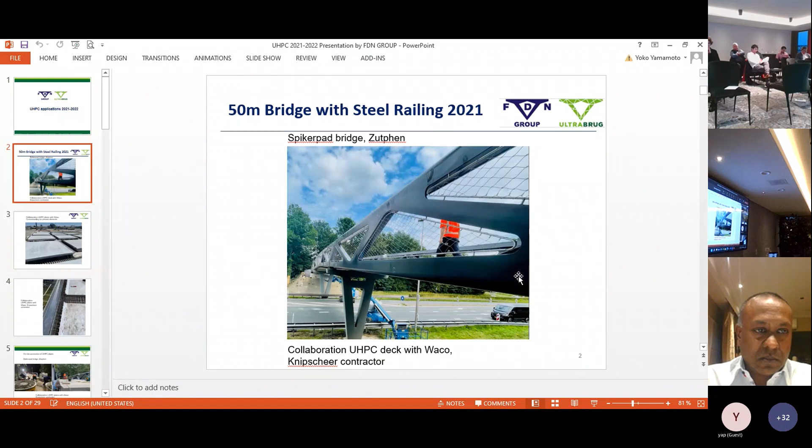The deck elements were about 5 meter by 3 meter in size, and we had 14 of these deck elements. Here we see the elements which we made in Bergen op Zoom at Waco. Aalborg Extreme was used as the UHPC.

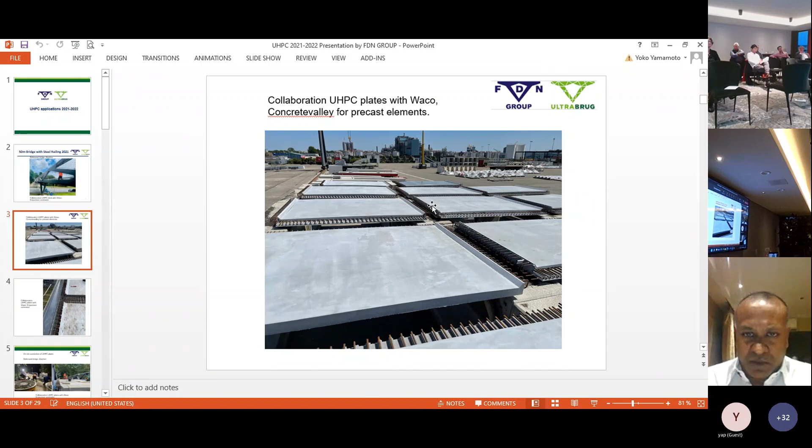It was quite a complicated connection, which another group also designed for the tender, with very slender connection plates, as you can see on this slide. It had to be produced in a few weeks' time.

So it was more of a logistical problem than just design problems. Here you see the connection with the steel railings and the UHPC plates. There were welded rebar onto the steel railing sticking out, and then we made an in situ connection of the plates to the steel railings.

This whole bridge was built in one weekend, Friday, Saturday, Sunday. It was only possible with this precasting method to do this with the large steel railings. We also researched whether we could do these railings in UHPC concrete with post tensioning, but that was too difficult. The steel railing was much lighter to handle and to be placed in one weekend, so that was the choice.

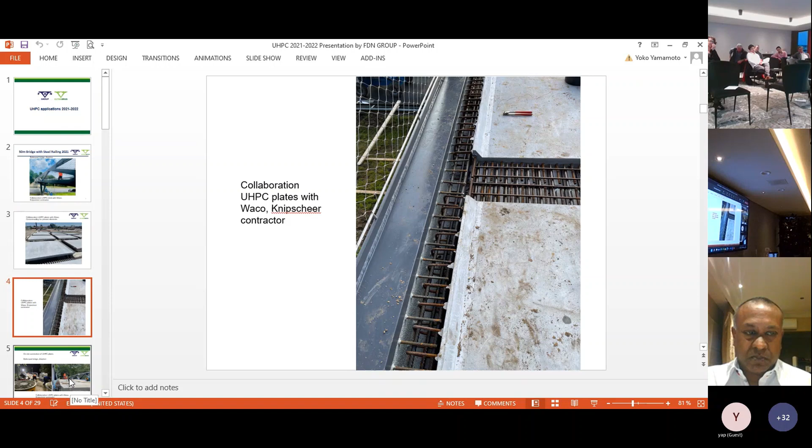Here you see the on-site work. It was actually the whole weekend, day and night, we were working on connecting the UHPC plates to the railings. It was mixed on site and then poured onto the connections.

You can see here that these were really small mixers, about 400-liter mixers, which were hired for the on-site connections. The mixers were just too small, so it was quite a lot of work to mix and pour this concrete. In retrospect, we think we would have done it much differently if we had another project like this.

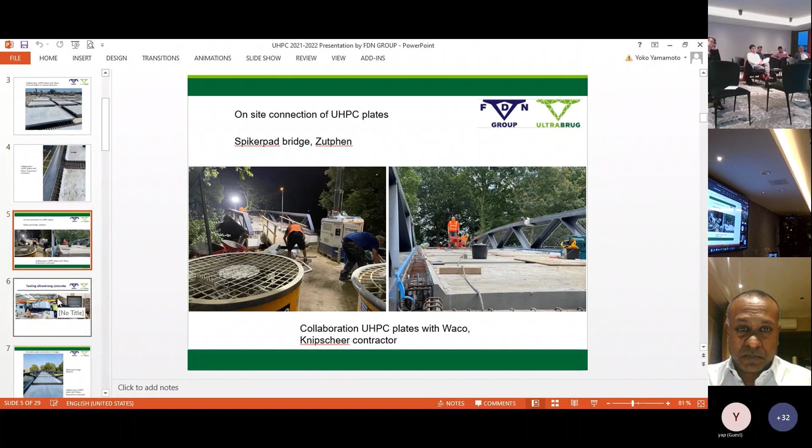Here you see us, we didn't have this kind of mixer. This is a large mixer with about 2 to 3 cubes of concrete, which could be mixed on site. This was only available after we finished the previous project, so there was not much chance, but this would have made the job much easier.

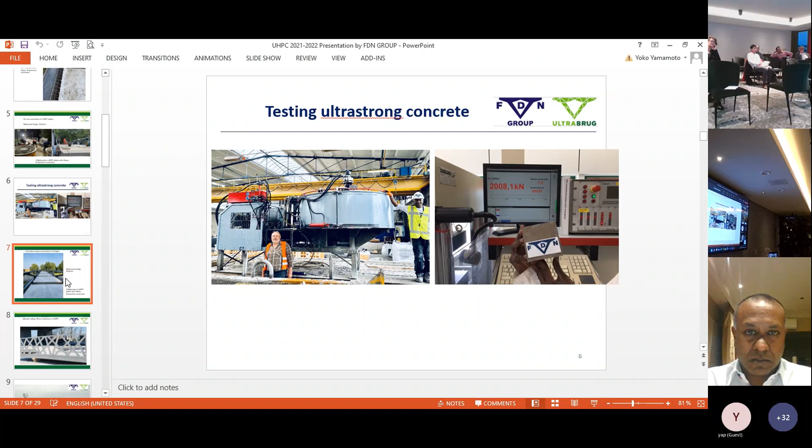This installation of the plates was done actually within about 5 hours. All plates were laid between the 2 railings, and then it took us about 24 hours to make the connection between the plates and the railing.

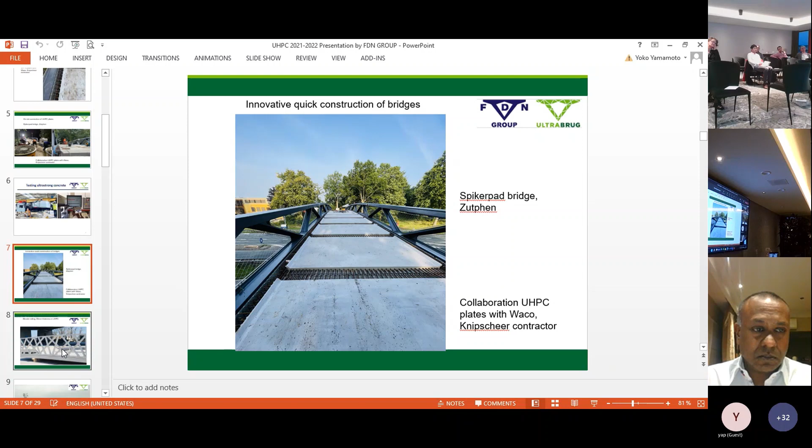This is another UHPC bridge project where, since we are mainly structural engineers, we tried to make it as slender as possible for a pedestrian bridge. So these railings have a thickness of 50 millimeters.

The positive thing is that we tested the railing and it fulfills the 3.5 kilonewton horizontal load. The only problem is that the client still does not really believe this is possible, so we still have discussions about the two bridges we built with this railing. But it fulfills, it's calculated according to Eurocode.

But of course, when using UHPC, this was a C130/145 quality. The Eurocode does not comply with this material, so we always resolve it through testing. That does create a bit of confusion or discussion with the client about what is allowed and what is not. In the end, you do a test to prove that the railings fulfill the Eurocode loadings.

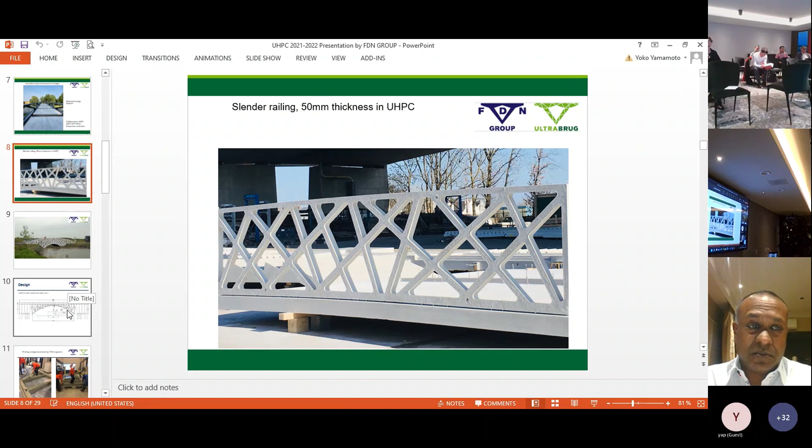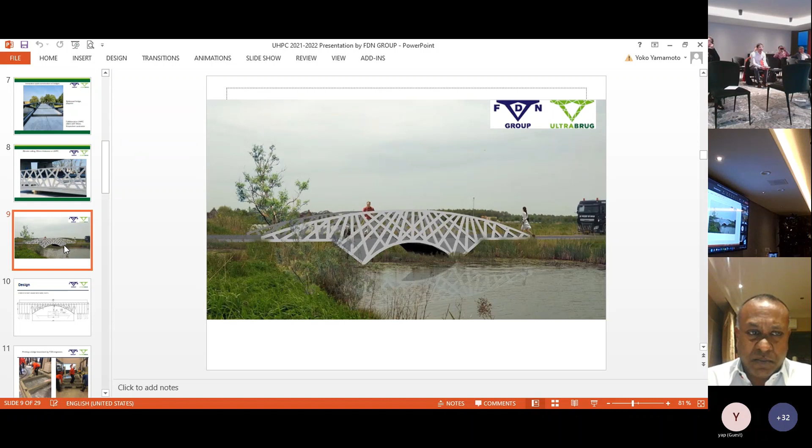This is a design also made with high performance concrete, but it's a design for a printed bridge. We did the design work and also the research to make this bridge. It's not constructed yet, but this is a railing that has been printed. And the main structure of the bridge, shown next, is an arch configuration.

It's actually made out of printed parts which are connected to each other with UHPC, and with high strength concrete, the connections should be possible too. We wanted the bridge, which is not a pedestrian bridge but a heavy traffic bridge, designed for a 30-meter length. You can see the arch is about 24 meters long.

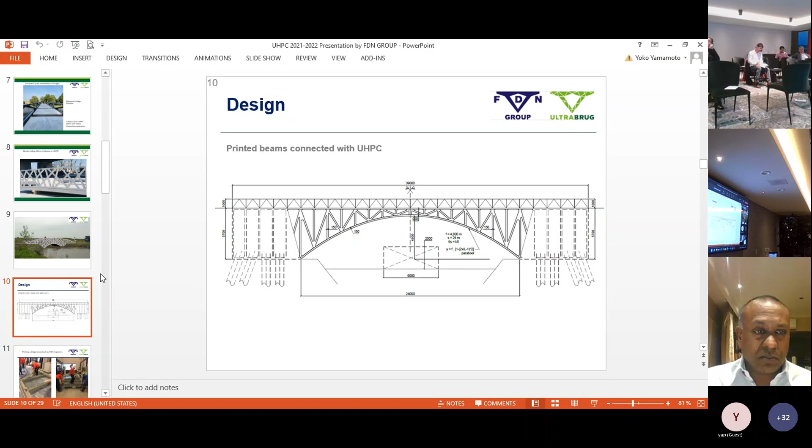And we incorporate foundation piles, steel piles, into the printed bridge structure. In the next slide, here we are busy actually printing with a concrete printer, printing the layers.

It's a C90 quality concrete used for printing, but that's not sufficient for a heavy traffic bridge. So after each print layer, we lay reinforcement by hand in between. This is a group of about 5 persons laying the reinforcement for one beam. We do think that in the future there will probably be some robot doing this work, but for now we have to do it by hand until such a robot is developed.

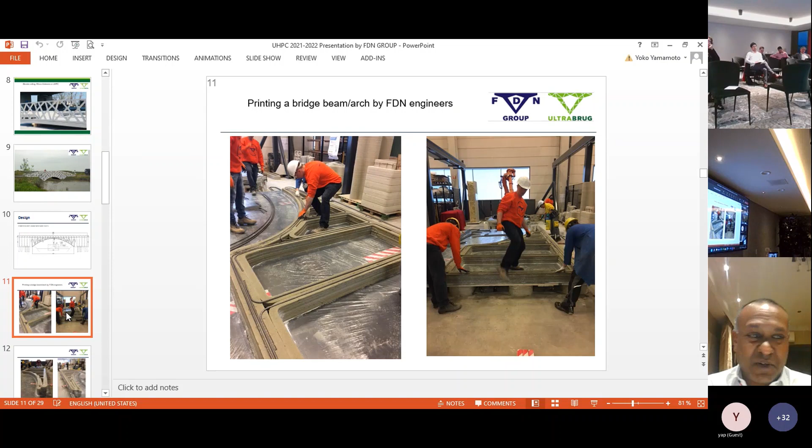This next slide is the finished half arch of the printed bridge design. You can see the end result on the left, and on the right you can see that after a few layers of printed concrete, we have placed the reinforcement in the layer.

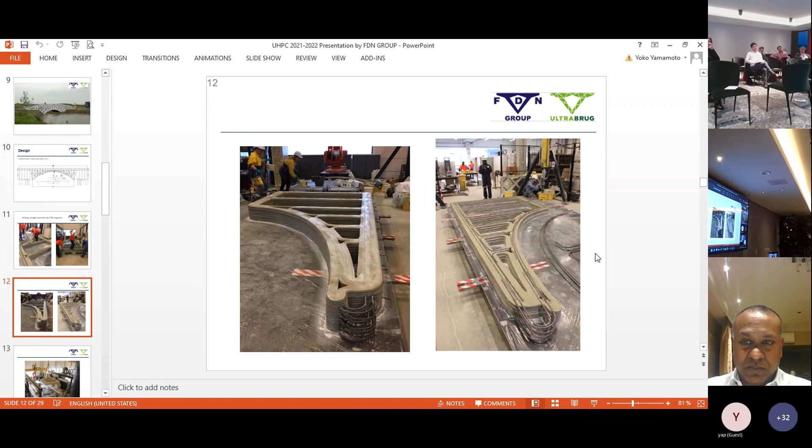This is me standing next to a setup which we are testing on heavy traffic loads. In the middle, on top of where I'm standing, is a UHPC connection between the two arch parts. We printed the left part and then the right part, and then connected them with UHPC in the middle. This beam was tested up to the Eurocode heavy traffic loads.

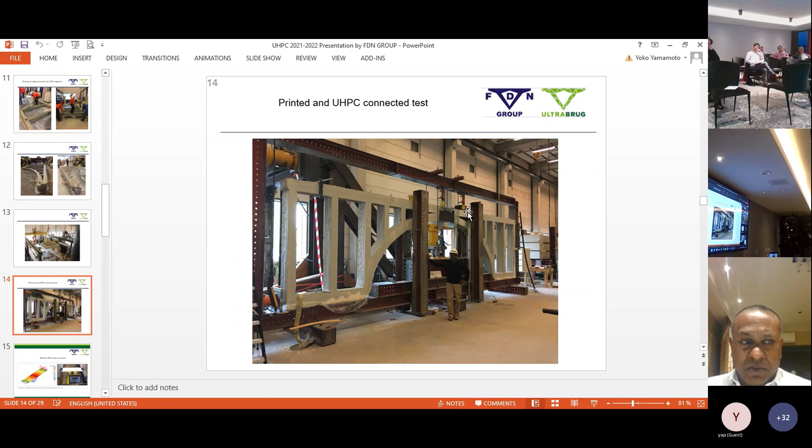This next slide is about a step which we optimized. That means for a staircase for a school, we made steps with a thickness of 35 millimeters. Again, because it was so thin for a building step, for a staircase, we ended up in a lot of discussions about whether this complies or not. So we had to test the step, and calculations are always conservative, so we were quite sure that this complies.

But then during the test, you could see that it could handle twice the load of the ultimate limit state. So our client was quite satisfied that, although the step is so thin, there is sufficient safety against collapse.

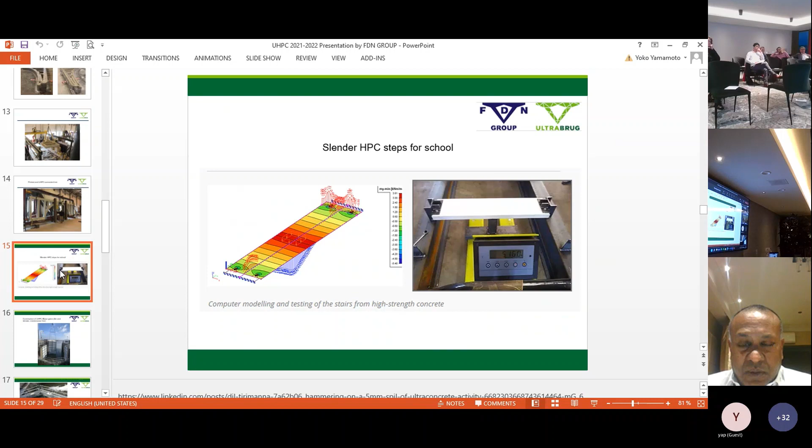The latest project, although we've been researching this for almost 3 years now including the Corona period, is making sluice gates with dimensions of about 7.5 meters by 5 meters for the province of Groningen. We first did material testing, then collision testing on thin plates, and after that we started the construction phase.

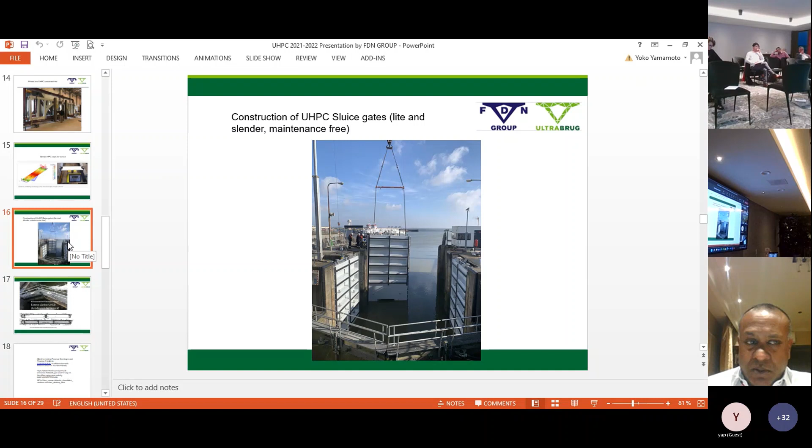I can show you on the next slide what the sluice gates look like. This is what we are calling the first slender UHPC sluice gate. The thickness of the plate of the sluice gate is 60 millimeters, and we use rib structures to stiffen the plate where necessary.

It should be able to withstand heavy ship loads. But of course, the reason we are making floodgates or these sluice gates in UHPC is for maintenance. Also, one problem was that it has to be a light structure, because previously there were wooden sluice gates there, so we have to comply with the load the existing concrete structure needs for all the joints of the sluice gate.

That's the reason we have chosen UHPC. The top part is just a thin plate with ribs, and the bottom part consists of two plates of 60 millimeters with an EPS core. That's the part that goes underwater and gives an uplift for the floodgate to make it even lighter.

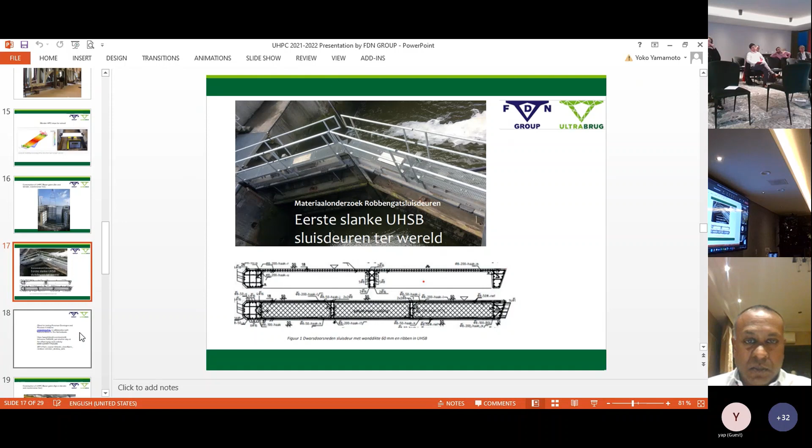This was a slide, I do not think it will work, but when the presentation gets shared you could click on it and see some testing we are doing on thin plates of 60 millimeters, where we have a kettlebell of 45 kilos that we lift up with a crane and drop onto the 60 millimeter plate to see what happens. According to the tender regulations, we had to do a test with a kettlebell of 45 kilos and drop it from a height of 3.5 meters onto the thin plate.

But in reality, nothing happened from 3.5 meters, so we lifted it up to about 22 meters. When you make your calculations, the load on the plate by this kettlebell is about 30 tons when you lift it to a height of about 22 meters. So we dropped it on the plate, and nothing happened - the plate just survived this load. Our client, the province of Groningen, was also quite satisfied that small ship collisions will not cause the door to collapse.

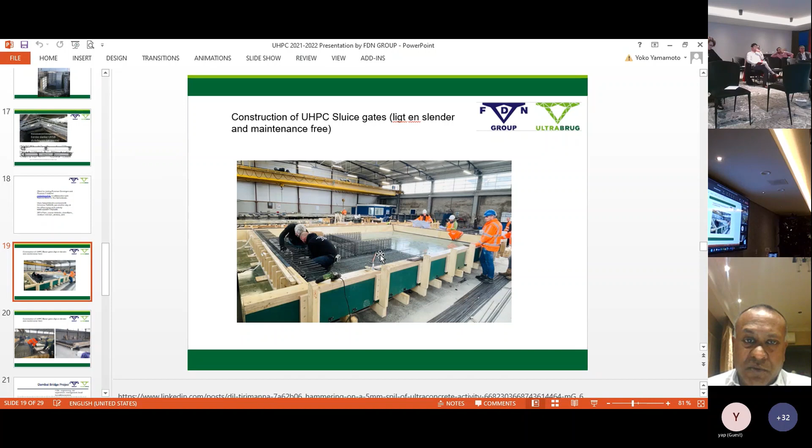These are some photos of the production of the sluice gate in Groningen itself at Haitsma, a large precast builder. We use traditional reinforcement plus fibers for this gate. Here you see the reinforcement with the hinges of the sluice gate and the placement of polystyrene blocks on the left side in construction.

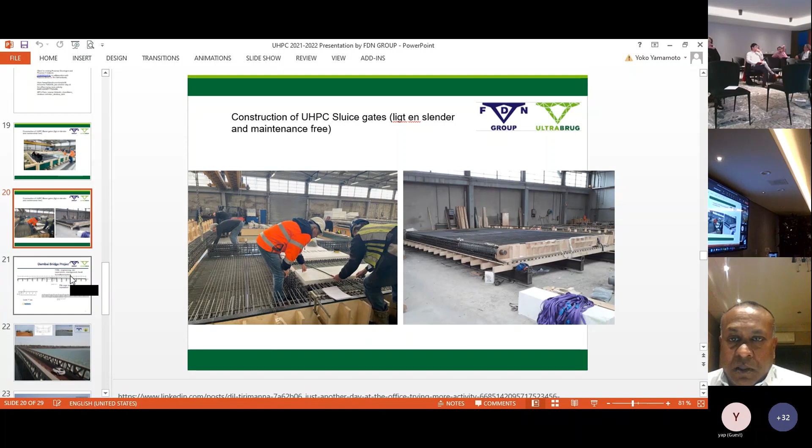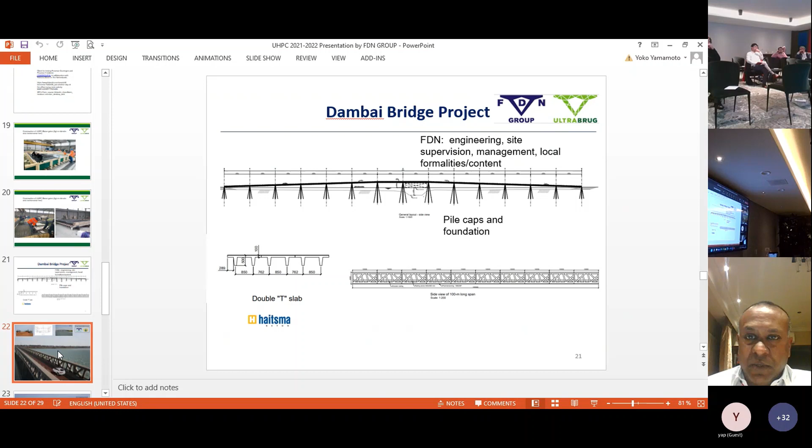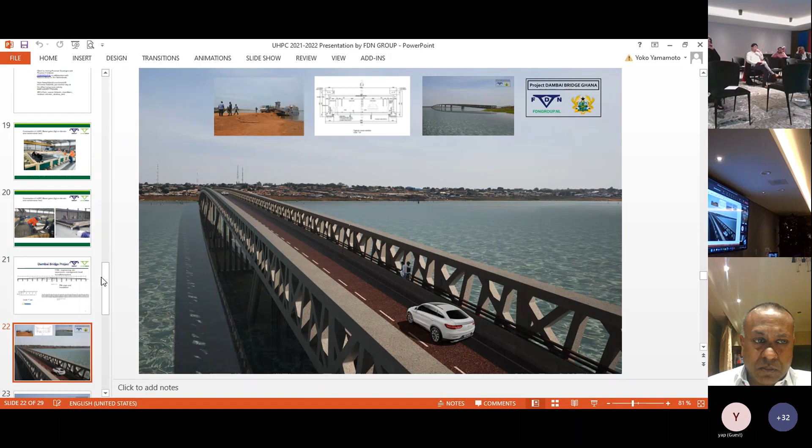This is one of their main rivers, and the bridge has a width of 11.5 meters. Here's another impression of the bridge, and this is the cross section. What we plan to do is produce elements in UHPC in the Netherlands and transport them to Ghana for quick construction - that's actually the plan for this.

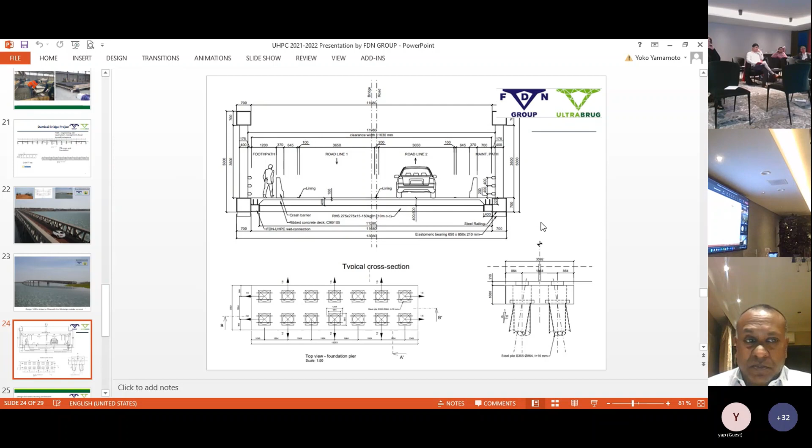Further at FDN, we design many projects and constructions in concrete. One of the products we developed about 15 years ago are floating breakwaters. Currently we also have a project designing floating breakwaters, where the wave height to be damped is around 4 meters, so we are making a design for a floating breakwater in high performance concrete.

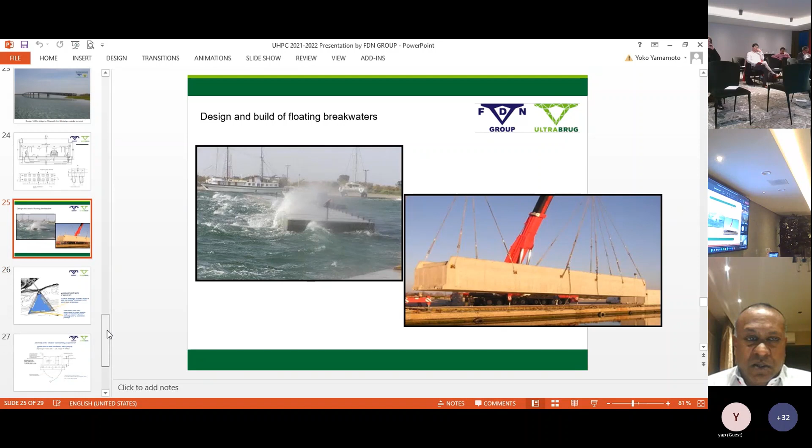You can see on the next slide what this looks like, because high performance concrete is really a material for a sea environment, with thin elements you can produce. You can see this is a triangle shaped port in about 80 meters water depth, and we will prefabricate elements in a dock, then tug them to site and connect them with each other.

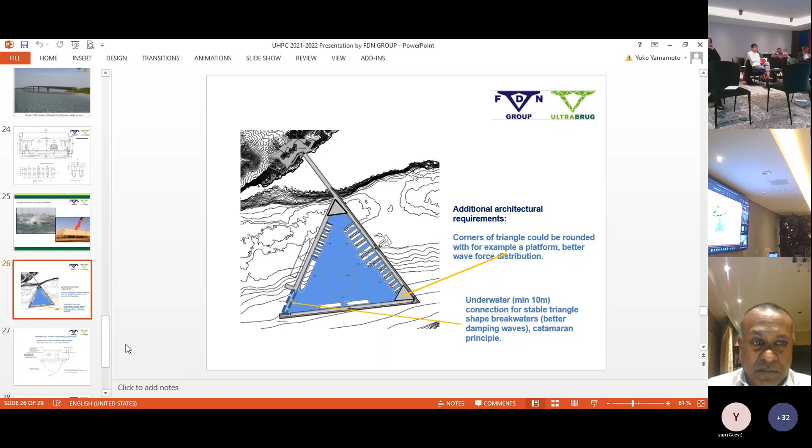This is also a project from 2022 in the design stage, where we will consider different kinds of UHPC and also compare it with traditional C60 concrete. This is a cross section of the high strength concrete - we used C90-105, but more optimized will be a C120 quality concrete, to see how the elements look.

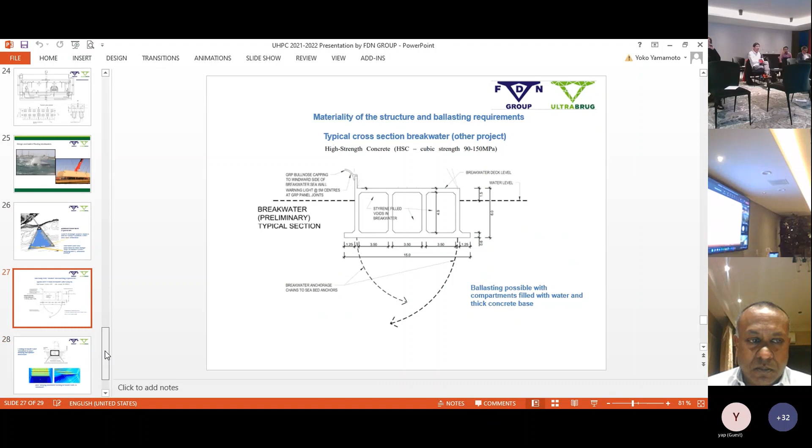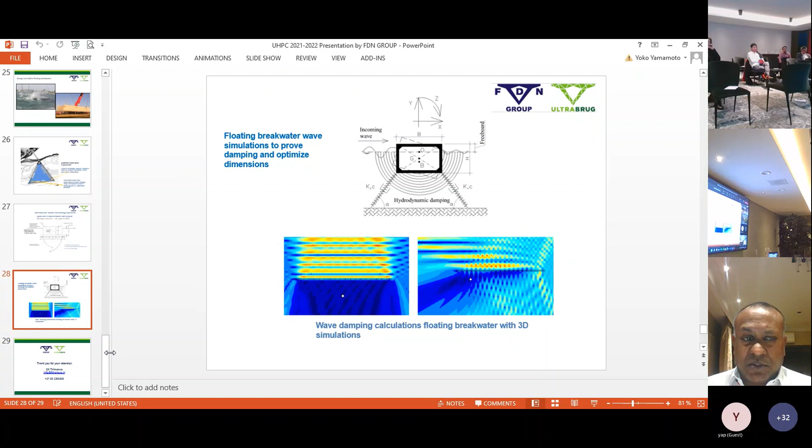This is just for information - after designing the element, we always make some wave damping calculations to see how the element will work as a port structure. Thank you very much. If there are any questions, I can answer them now. Thank you.